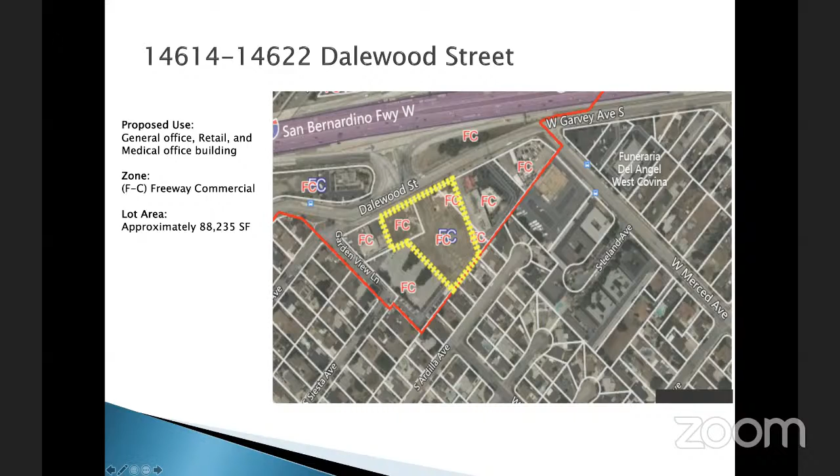The proposed project will develop a 59,766 square foot, 6-story building to include retail, general office, and medical office space on an approximately 88,235 square foot lot. The proposed building would include approximately 50,566 square feet of general office, 8,000 square feet of medical office, and 1,200 square feet of retail space.

The proposed project would provide a total of 221 parking spaces, including one level of subterranean parking with 21 parking stalls and a surface parking lot area of 200 stalls. The building footprint would be 11,055 square feet and represent lot coverage of 12.5%, where 50% lot coverage is allowed.

The applicant is also proposing a total of 7,331 square feet of landscaping throughout the site, located around the perimeter of the site and within the parking areas. Landscaping proposed fronting Dalewood Street would soften the aesthetic appearance of the building from the street. In addition, an enhanced landscape buffer along the southern boundary of the project site would be provided. A final landscape and irrigation plan are required per the conditions of approval.

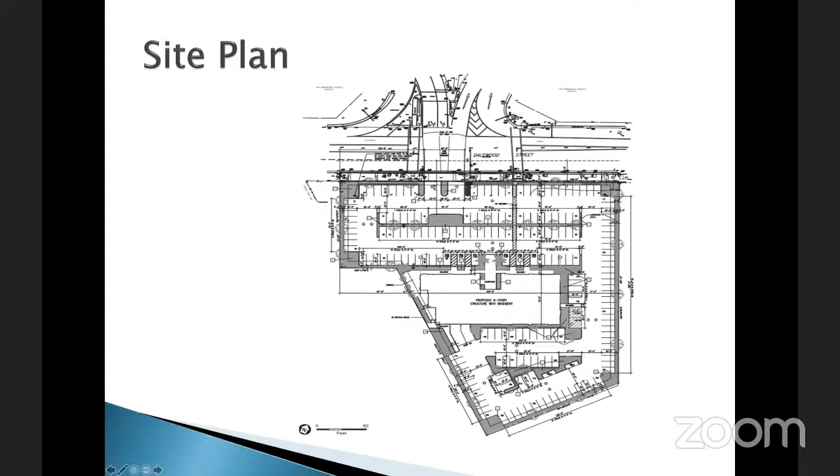The ground floor would consist of general office space, bathrooms, a lobby, and an outdoor entry plaza. Access to each of the stories will be provided by 3 elevator shafts located centrally in the building. The elevators would provide access from the basement parking level up to the 6th floor, and 3 stairwells would also provide access from the basement to the 2nd floor. 2 of the 3 stairwells would continue access up to the 6th floor.

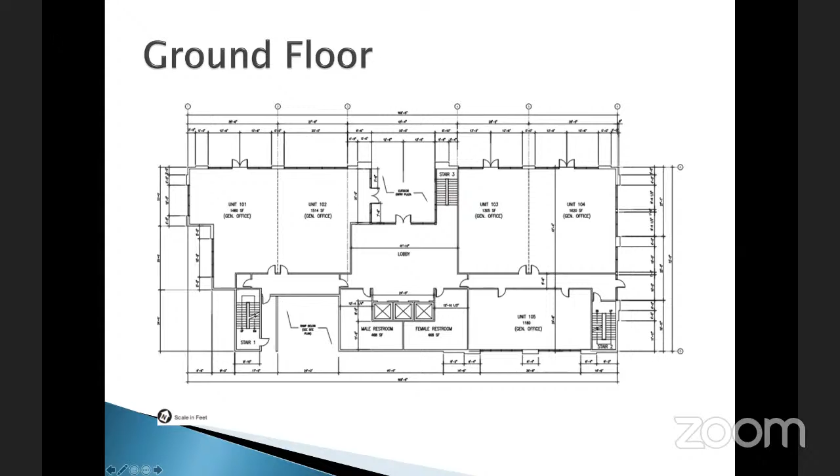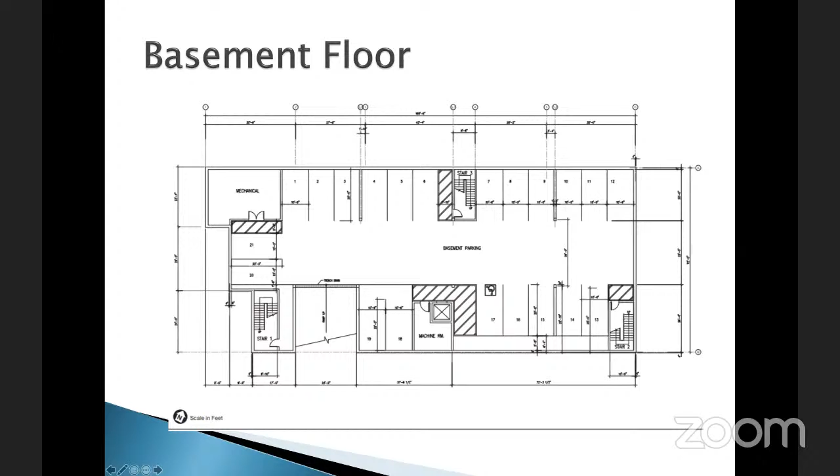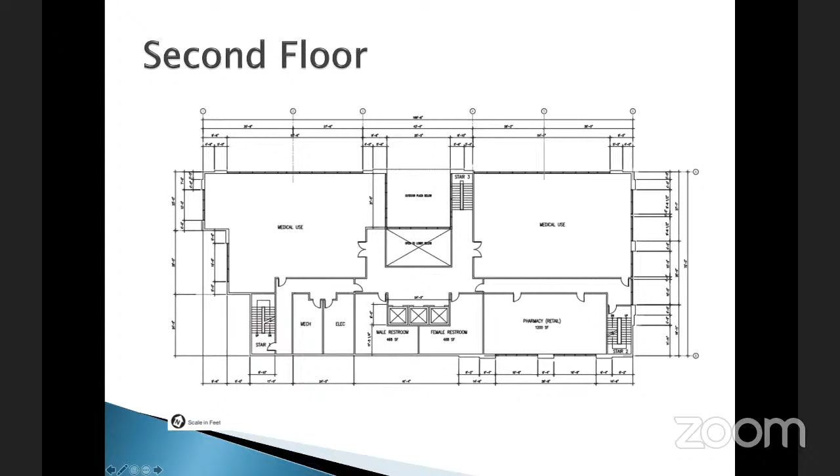The basement would consist of 21 parking stalls, a subterranean parking garage with ancillary mechanical rooms. The 2nd floor would consist of medical uses, bathrooms, small mechanical and electrical rooms, and a pharmacy. The 3rd, 4th, 5th, and 6th floors would consist of general office space, bathrooms, and small mechanical rooms as well.

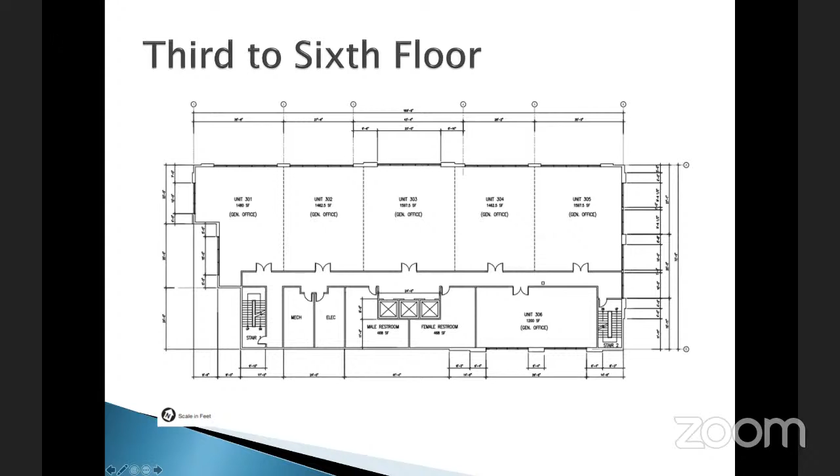The proposed development would be visible from the surrounding area, including surrounding streets and buildings. The 6-story structure would be 96 feet in height and would be within maximum height allowed within the City of Baldwin Park zoning code, which does not specify building height limits, but specifies maximum allowed height as stories within the freeway commercial zone. The proposed building reflects a contemporary architectural style and provides for articulation in building surfaces.

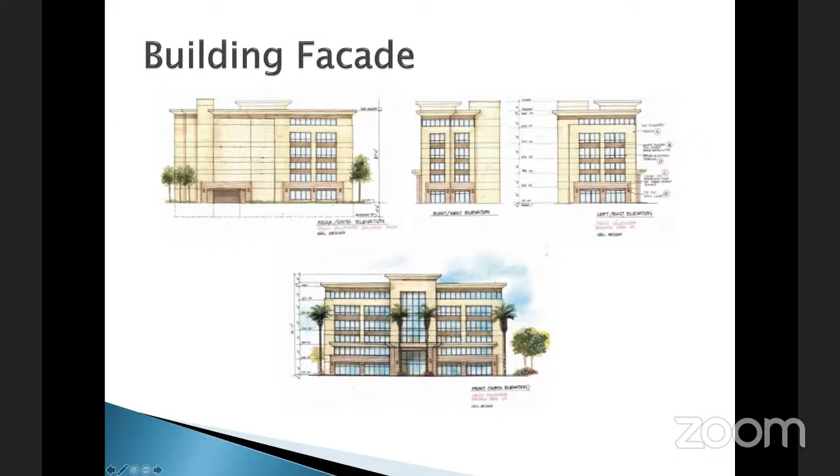The exterior of the building would be finished with stucco earth tone colors such as brown and beige, and would include non-reflective glass on all 4 sides of the building. The building will also include stone veneer throughout the ground floor, front, rear, and side elevations. Custom wall light fixtures would provide accent lighting at night.

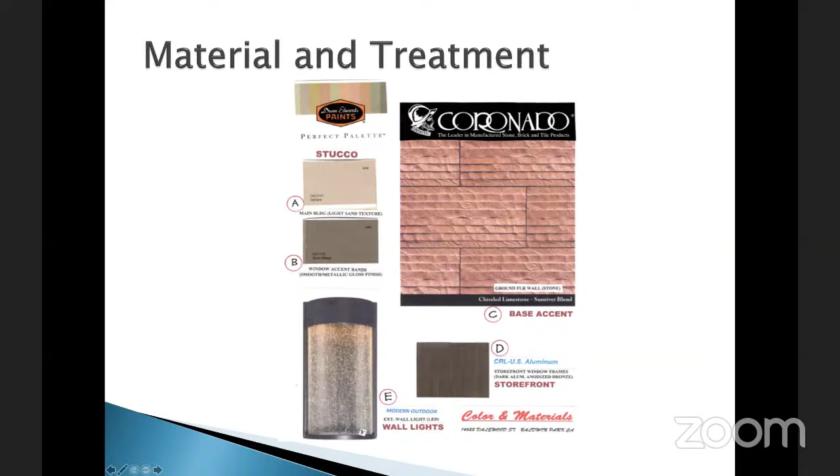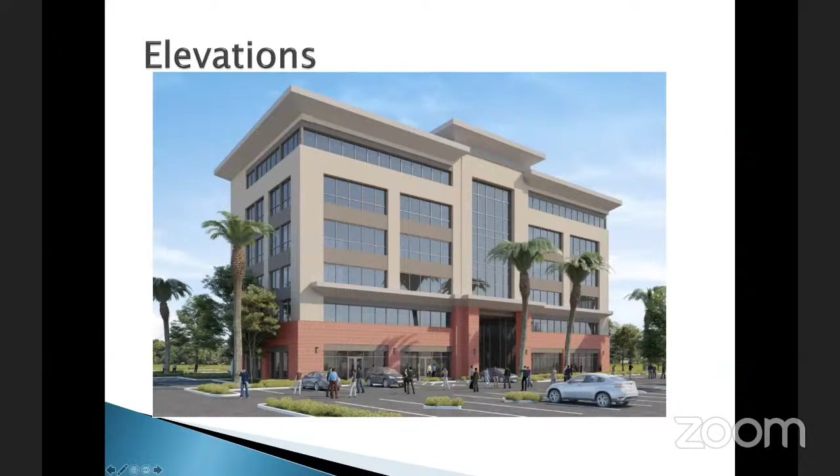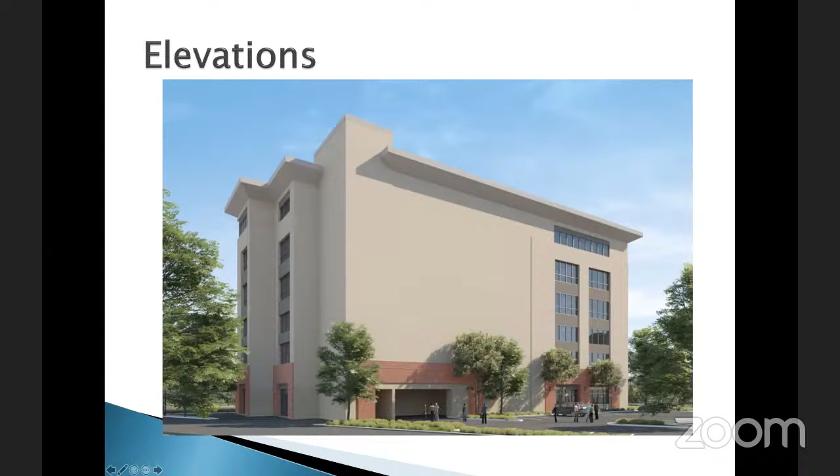Here we have a rendering showing the proposed 6-story building and the proposed alternative materials on the facade of the building. And here is a rendering of the rear side on the southerly side of the building, and you can see the subterranean parking garage entrance there at the bottom.

As mentioned, the project will require the approval of a tentative parcel map. Within the municipal code, in the freeway commercial zone, the minimum lot size required is 4 acres, the minimum lot width is 300 feet, and the minimum lot depth is 200 feet. All of the parcels do not individually meet the minimum lot area, width, and depth. When merged, the newly created parcel will become an approximately 88,235 square foot lot with at minimum 177 foot width and 125 foot depth. Therefore, the newly created parcel will fall short of the required lot depth, width, and size.

By consolidating the parcels, this will create less of a non-conformity than if left as individual parcels.

And moving on, as requested, a zone variance. If we can go back to the slide. Thank you. The applicant is also requesting a deviation for the minimum lot size, depth, and width, as previously stated within the freeway commercial zone. And again,

Within the freeway commercial zone, you're required a 4 acre minimum site, a depth of 200 feet, and width of 300 feet. So in this case, just to give you some context, the lot is irregular in shape. Along the frontage along Dalewood, you have a width of 334 feet. But as you move towards the southerly part of the lot, towards the rear boundary of the parcel, it narrows, and there the lot width is 177 feet.

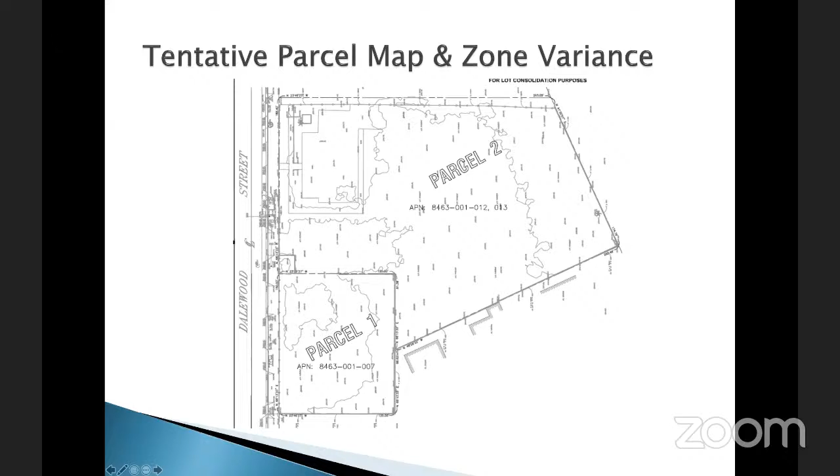Next slide. Finally, a mitigated negative declaration of environmental impact was prepared by Environmental Science Associates along with the traffic consultant, the Ganddini Group, in compliance with the California Environmental Quality Act. The MND was circulated for public review from November 2nd through November 23rd. All owners and occupants within 300 feet of the parcel were notified, in addition to posting the document as required. Comments were received from the City of West Covina, LA County Sanitation Districts, and Caltrans.

Response to comments was included in the staff report for your review. Regarding the comments provided by the City of West Covina, the applicant agreed to those mitigation measures, which included providing a sound barrier along the southerly property line, the border of West Covina, during construction. The applicant did agree to those mitigation measures. And lastly, the mitigation measure that during construction, parking of contractors be provided on site. The applicant did agree to those as well.

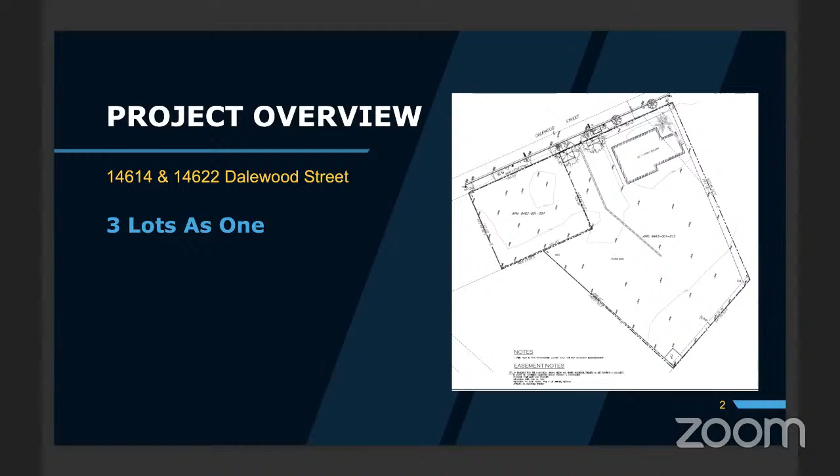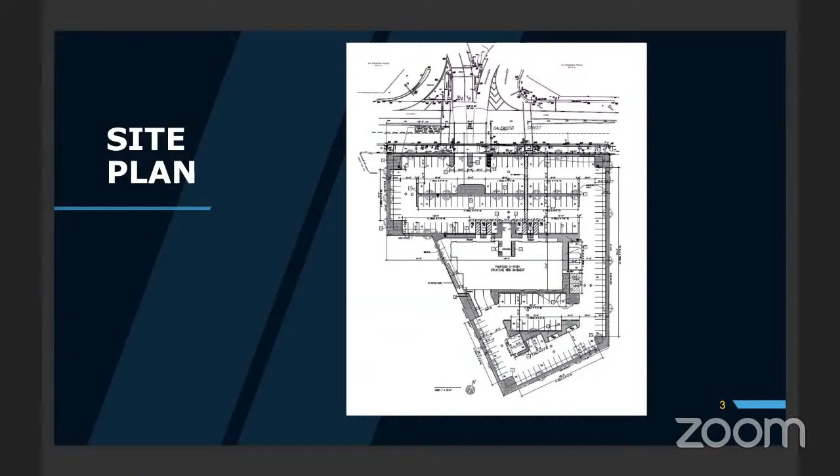The project consists of a new 6-story, 60,000 square foot building for commercial use. We currently have 221 parking spaces, including 1 level of subterranean parking.

The floor plan will be for general office, retail, and medical office building. There will be 3 banks of elevators and a spacious lobby on the first floor. We've enlisted a nationally recognized brokerage firm to approach multinational corporations for lease terms.

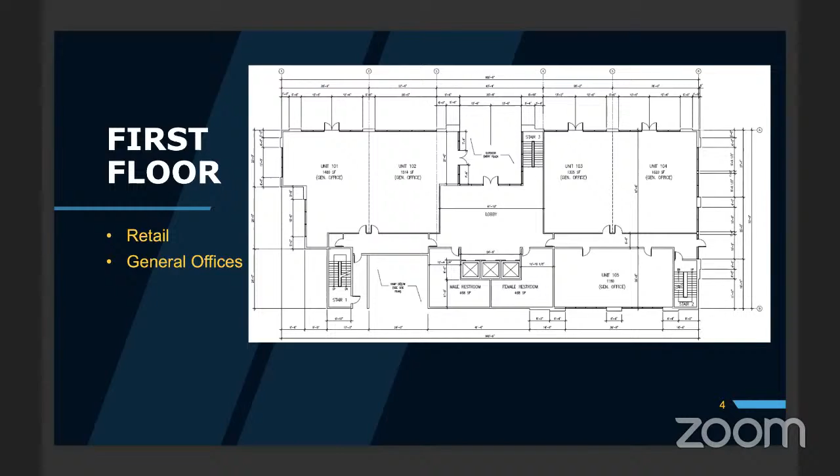Per the impact report that we commissioned, the project does not have a significant environmental impact, which is labeled a negative declaration. All mitigation measures have been incorporated into the project's design.

In our opinion, this will be the eastern gateway into the beautiful city of Baldwin Park. If you look at the surrounding area, it's rather dilapidated and not improved, so we really feel that this will bring a sense of rejuvenation and sophistication to the area. We also feel that the project satisfies the need for higher end commercial space that is close to the I-10.

Architecturally, it'll feature beautiful stone veneer and glass, demonstrating a contemporary style. The landscaping will be modern and exceeds the minimum 10% threshold required for parking lot area in the city.

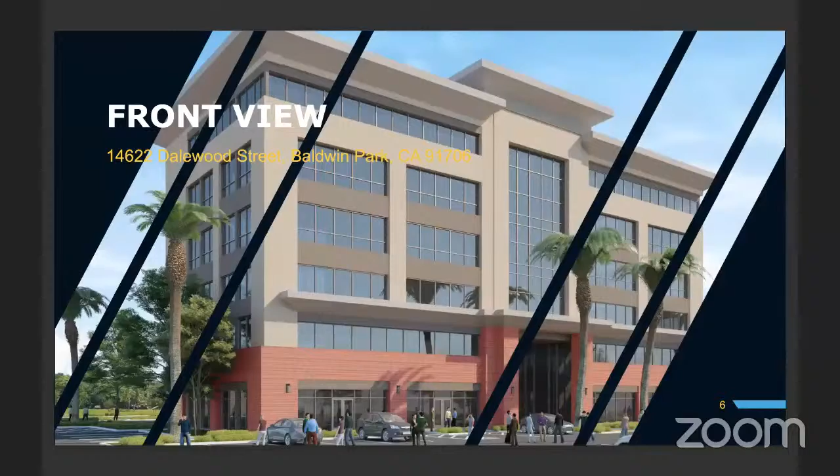Both Dr. Lopsiwala and I are residents of San Gabriel Valley for over 40 years, so we're especially proud of this project. We have worked cooperatively and patiently with the kind planning staff for about 5 years now, so we look forward to your favorable consideration. Thank you.